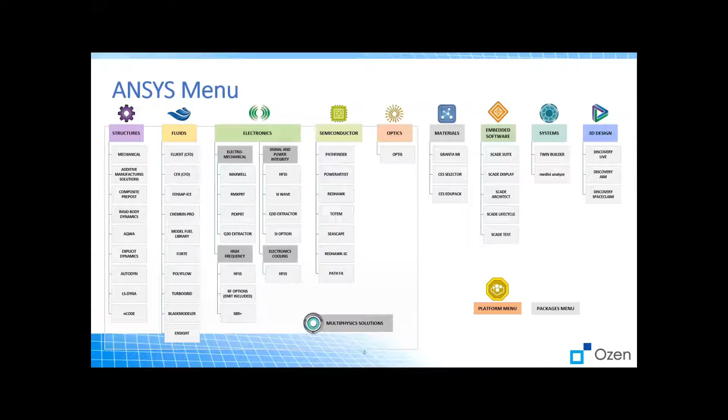The outline of the current presentation will be: first, an introduction to turbomachinery. Then we'll go over ANSYS legacy tools, which is mostly Vista. Then we'll have an introduction to CF Turbo, a new tool that can model fans, pumps, compressors, and also turbines.

Turbomachinery or rotating machinery is pretty much everywhere. Whether you have a pump or compressor or anything which is rotating, you have a turbo machine. They have a lot of applications in oil and gas, defense and aerospace, automotive, HVAC, data centers and IT hardware, marine, and chemical processes as well.

They have been around for a long time, and ANSYS already has a workflow for modeling such equipment. The legacy way that ANSYS does it mostly is through Vista and BladeGen, which we'll go through in the next slides.

If you are familiar with the Workbench, looking at all the tools you can bring into it, we have several tools named Vista, and based on the application, they have different packs. For example, Vista AFD, which is axial fan design. CCD is like centrifugal compressor design. There's also CCD with CCM, which uses a performance map, and it goes all the way down to RTD, which is radial turbine design. Vista TF is for some preliminary CFD at the early stage - we won't focus on that too much.

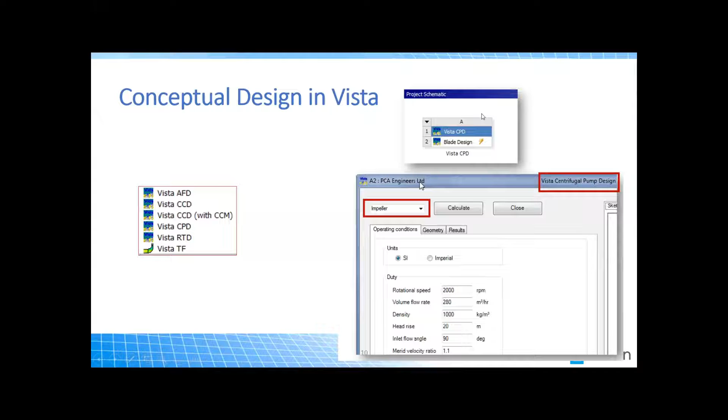As I started in the previous slide with an impeller, I provided a very minimal amount of data, these couple of pieces of information you see here. And here it gave me the efficiency curve based on the flow, and also the shape of the cross section, the side cross section, how it would look like. This is mostly based on the 1D design.

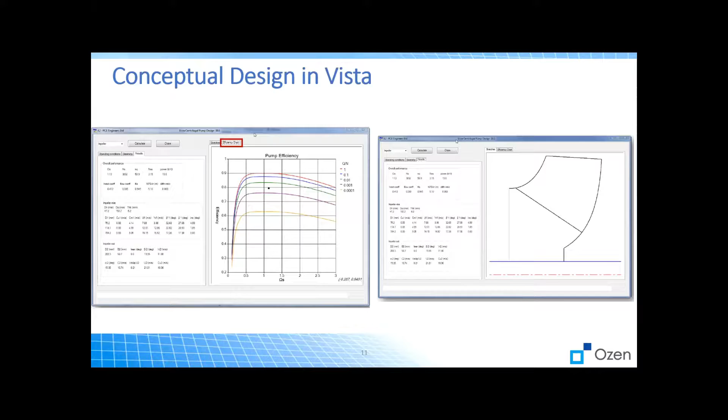After that, I just pass it by creating a new BladeGen, which is another tool we have inside Workbench. When you have BladeGen, it can give you a better approximation of the geometry. Here you see the meridian chart, the performance curve, the blade shapes, and after that, the most interesting thing is that you're able to get a 3D CAD out of it.

As you know, for 3D CFD, which is the most accurate type you can do at the moment in ANSYS, you need to have a 3D CAD as an input.

The beauty of Vista and BladeGen is that just by having minimally sufficient information on the performance of the device and the target flow rate and, let's say, pressure rise that we have in mind, it can give you an acceptable 3D CAD so you can initiate your 3D simulation, mostly CFD.

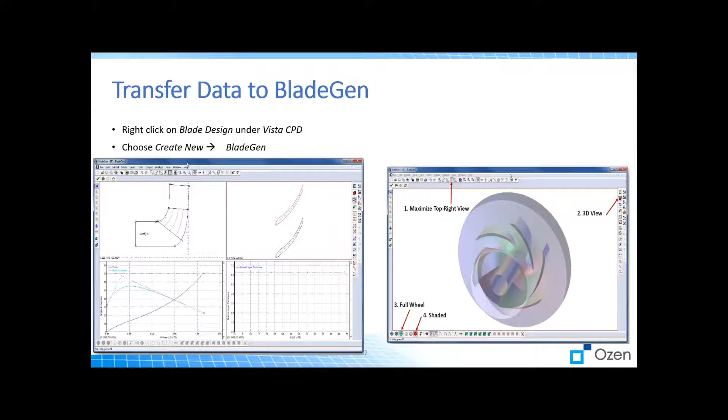Here's the workflow that they follow. As I mentioned, for initial design, you start with Vista and BladeGen. It creates some initial design or geometry for you, and then you pass it to other ANSYS tools for meshing.

You can do the meshing via various tools, but the most recommended are ANSYS Mesh and TurboGrid. TurboGrid is highly specialized for turbomachinery devices, but ANSYS Mesh can be used. It's pretty much generic. Also, you can use ICEM, Gambit, or TGrid if you're more comfortable with those tools.

After meshing, we can easily pass it to CFD solvers or other ANSYS solvers. The best CFD we have at the moment is CFX for turbomachinery devices. You can do multi-physics like FSI. You can even go back and modify the geometry using Blade Editor, Design Modeler, or Space Claim, and go towards an optimized geometry.

But the workflow, as you see, it's Vista, BladeGen, then some meshing tool, and then some CFD tool.

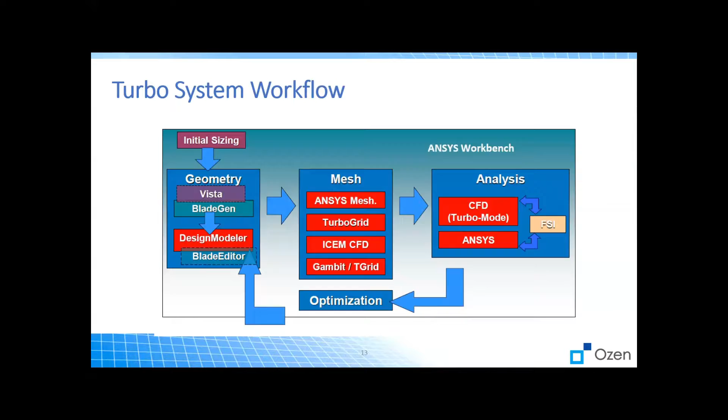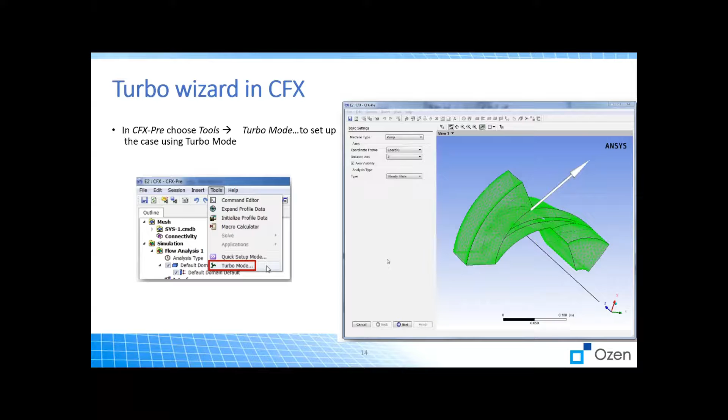The CFD tool we can use, as I mentioned, is either Fluent or CFX, but the most popular is CFX. It even has a turbo wizard inside that makes things much more convenient and straightforward, so you don't need to go through all the detailed steps. You can skip a lot of it using this wizard. These details will be brought up in the next slides, but I just wanted to mention it here.

What is CF Turbo? CF Turbo, as a company, is a new company which started in 2008 in Germany, and in 2017 they had a branch in New York, and they have been partnered with ANSYS. They have a very powerful tool for turbomachinery design.

That's very good for conceptual design. They also have some engineering services and product development, like total design of the turbomachinery, which we don't have time to go over. The good thing is that after being a partner, you can bring the tool into ANSYS Workbench as an extension, and it's totally accessible.

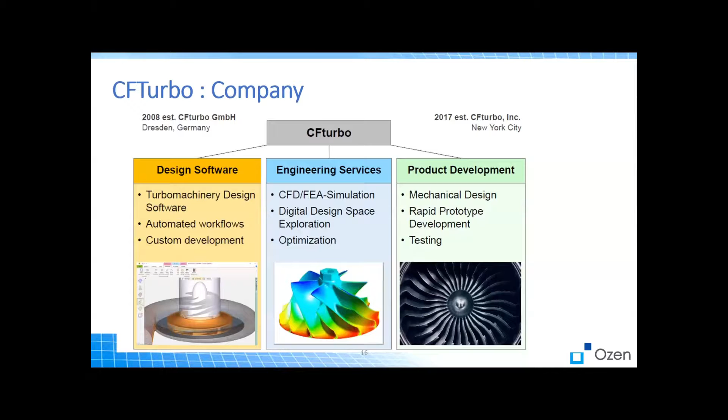The beauty of CF Turbo is that it's pretty much replacing Vista plus BladeGen, and out of the best efficiency point, or BEP, of a turbomachine, which is usually the target you set in the beginning, it gives you a nice 3D CAD on which you can do all kinds of 3D analysis such as CFD or FEA or anything else you're interested in. This is mostly based on very simple 1D equations like Bernoulli and Euler equations and conservation laws, but it's very helpful.

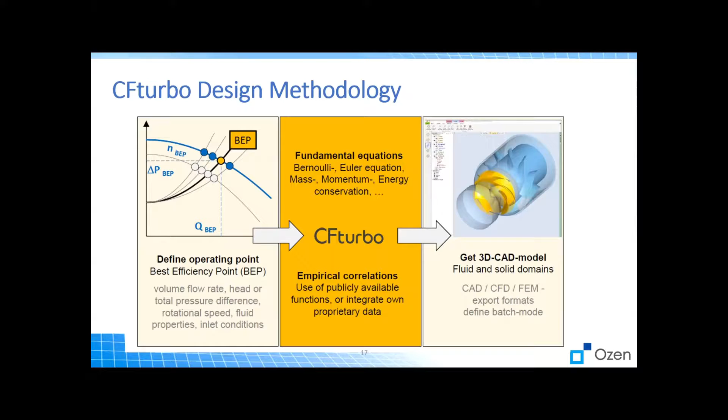Here, for example, are some blowers and fans which have been designed from scratch inside CF Turbo. As you see, it has a lot of capability; different types and different geometries can be modeled. These geometries have been generated from pretty much nothing, just BEP data and very minimal information.

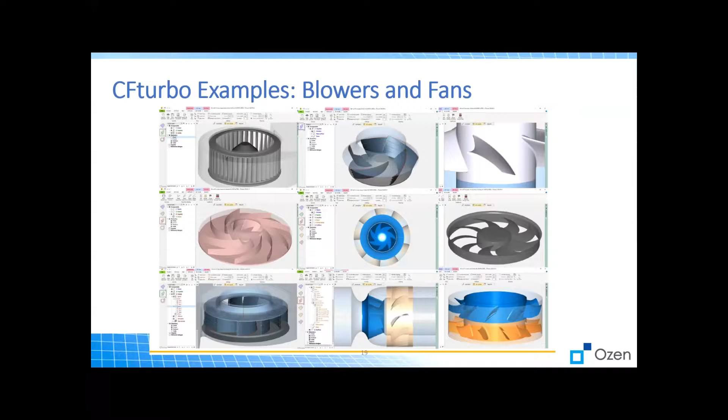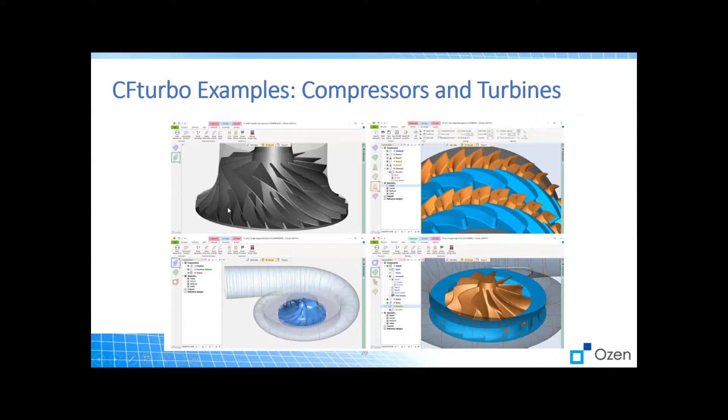Here's another example, which is compressors and turbines. I think this is a turbocharger of a car, and this is just a typical compressor with split and normal blades.

And this is another type of turbomachinery, which is pumps, which are also extensively used. You see there are different types of pipe pumps here, which have again been designed from scratch using CF Turbo.

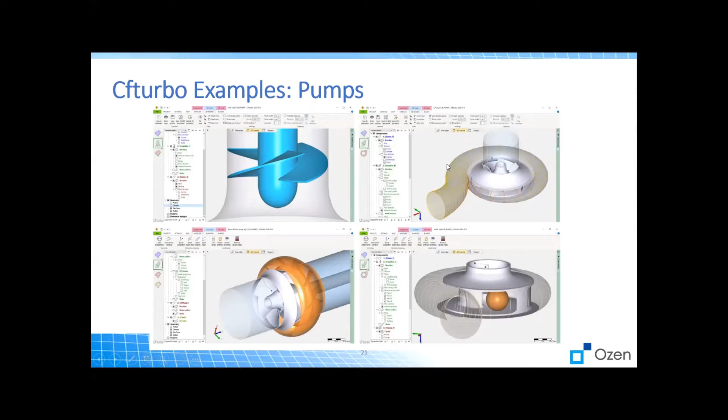Turbomachinery is a big category of devices, and they don't necessarily act the same way. As you see in this slide, we have at least 14 or even more types of turbomachinery. Based on the flow rate and the energy transmission, each certain type is recommended for use. And the types, as I mentioned, are quite large.

You have reciprocating pumps, positive displacement, gear pumps, vanes, scroll compressors, reciprocating compressors, axial compressors, screw compressors — all these types, which are quite complicated. But in turbomachinery, we can just solve these 4 types, which have been shown with the rose color here.

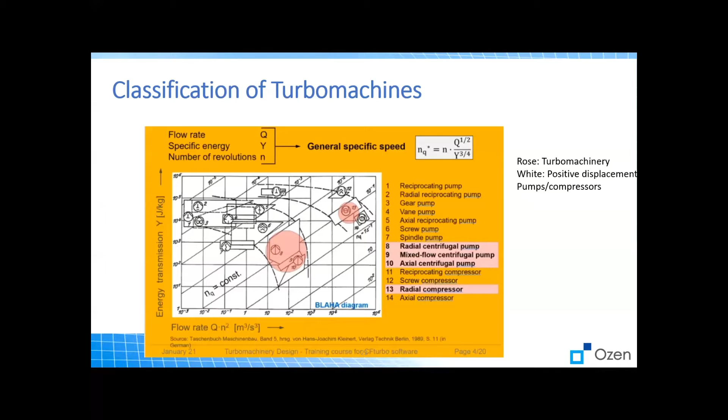That's shown as number 8, 9, and 10, which is radial centrifugal pumps, mixed flow centrifugal pumps, axial centrifugal pumps, and radial compressors. So the tool is very powerful, and these devices are very commonly used in the industry, but we can't solve every type of turbomachinery with CF Turbo.

This is another categorization or classification of the turbomachines. They can be radial — that's because the outlet shoots the fluid radially out of the device — or axial, which does it axially, or you can have something in between.

The fluid type could be hydraulic or thermic. Hydraulic is where the flow is incompressible, and thermic is where the fluid is compressible, so the density is changing. Another way of categorization is based on how they get driven.

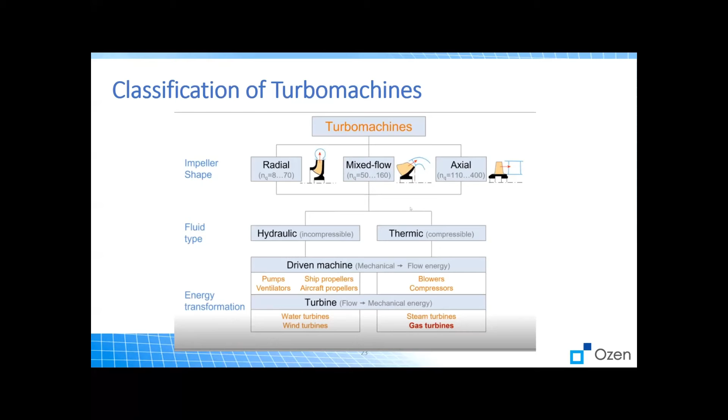You can have a driven machine, which means, let's say like a fan, you put some power into it and rotate it to create some excessive head or pressure in the liquid or fluid. Then the other one is the turbine, which gets energy from a high energy fluid and then rotates and creates work out of it.

This was a brief introduction on CF Turbo and turbomachinery. In the next YouTube video, we'll go over different devices and how to design them in CF Turbo. Thank you for your attention, and have a great day. Bye.